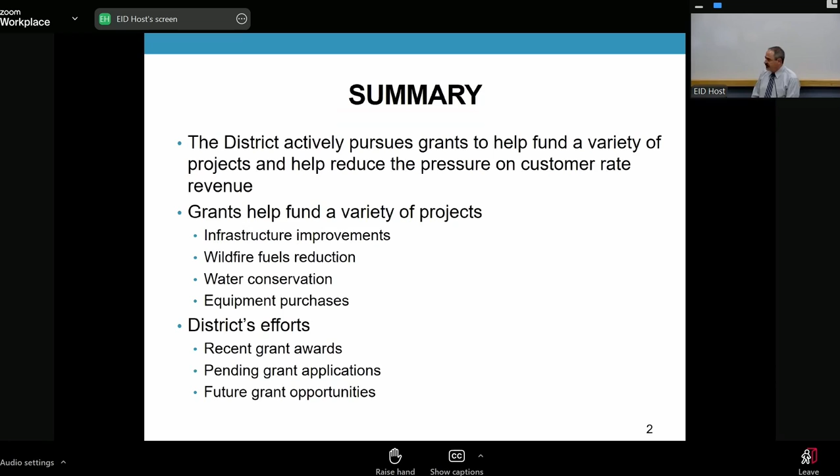All right, so first to start with grant awards. In the past 10 years, the district has received over $28 million in grant funding. These projects vary.

I'll just describe briefly going down this list. Folsom Lake Raw Water Pump Station received a grant of over $7.5 million through a cooperative agreement with the Bureau of Reclamation. Through the Regional Water Authority and Department of Water Resources, we've received funding for water line replacements and also for the Outingdale Intake Pump Station. We received close to $1 million through Reclamation for the Upper Main Ditch Piping Project. We received numerous grants through CAL FIRE's Wildfire Prevention Grant Program for hazardous fuels reduction projects around our critical infrastructure. And we've also received funds through FEMA's Hazard Mitigation Grant Program for emergency backup generators at both water and wastewater facilities.

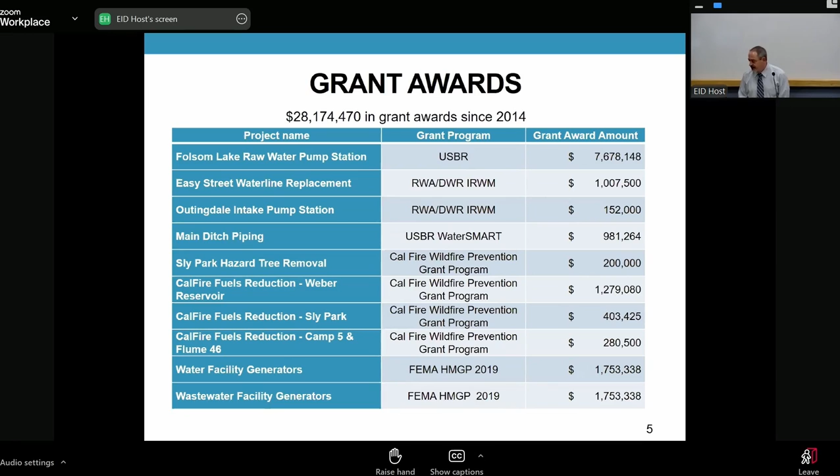Next slide please. Continuing on with grant awards, we've received a sizable grant for the Sly Park Intertie Improvement Project, another grant for the SPI through the American Rescue Plan Act. That same program, we also received funding for the Outingdale Dam Emergency Rehabilitation Project.

You may recall during the last meeting, Emily Bertram was here, EID's Park and Recreation Manager, describing the recent grant award notification they got for the skid steer masticator. Also recently, 3 other recent grants: meter replacement through USBR Water Smart program, a grant from CAL FIRE for additional fuels reduction work along the El Dorado Canal, and a grant through the FEMA Building Resilient Infrastructure and Communities Program for Flume 45.

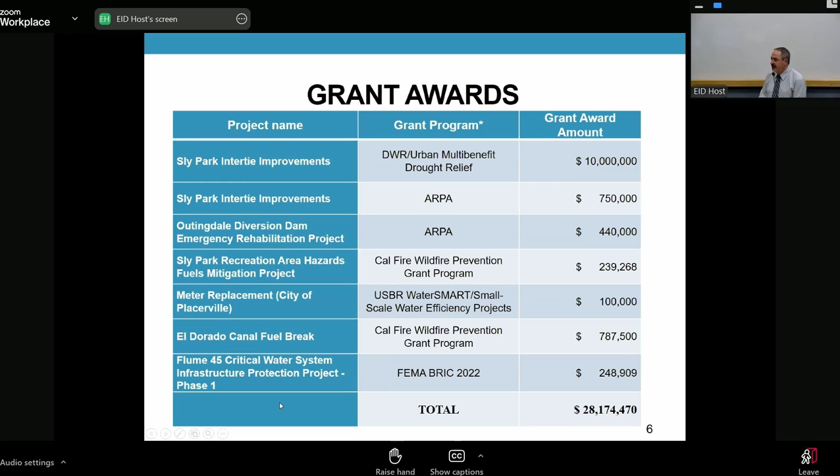I'm going to be talking about these last three in a little more detail. So meter replacement: we received a grant for $100,000 from Reclamation to replace some wholesale meters for the city of Placerville. This grant is going to help offset costs for planned replacements that needed to be done. There's 3 total meters in the scope of this grant, and they're going to provide more accurate reading - I'll be able to track water loss, identify leaks earlier, and just better overall accounting of the water.

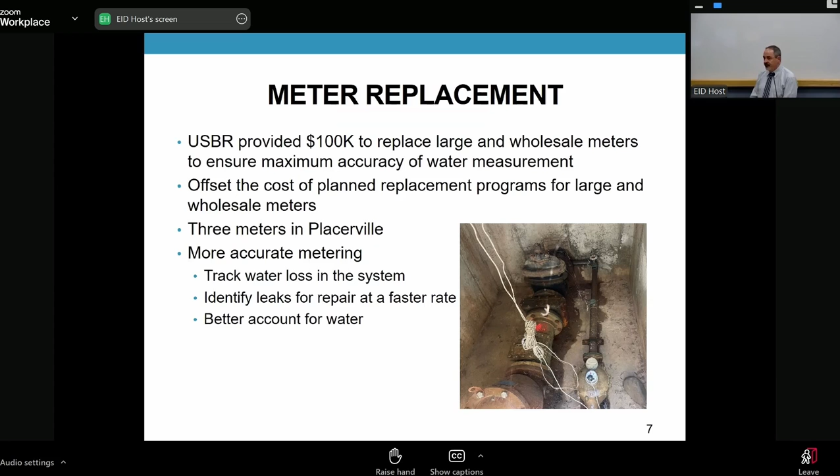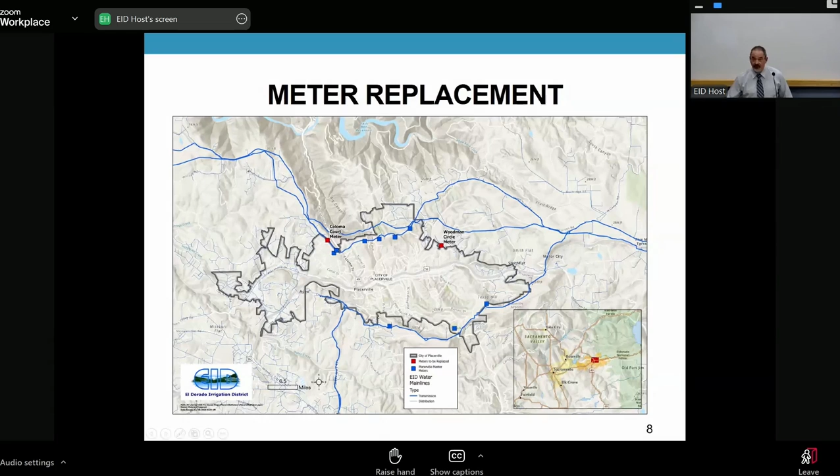This is just a map to give you an idea of where these particular meters are located. Placerville is roughly in the center of the map. The black line represents the city of Placerville's service area. The blue and red squares represent the wholesale meters that the city of Placerville has - there's roughly a dozen or so of them. The 2 red squares are the meters that will be replaced under this grant. I believe there's 2 at the Camino or Coloma site, and 1 on the eastern side - Woodman Circle, thank you. Next slide, please.

The El Dorado Canal fuel break. We received a grant from CAL FIRE for over $787,000 to do hazardous fuels removal along approximately 3 miles of the El Dorado Canal. This photo shows a segment of Flume 46. Flume 46 is approximately 3,300 feet long, a wooden flume, an asset that's highly at risk to damage from wildfire.

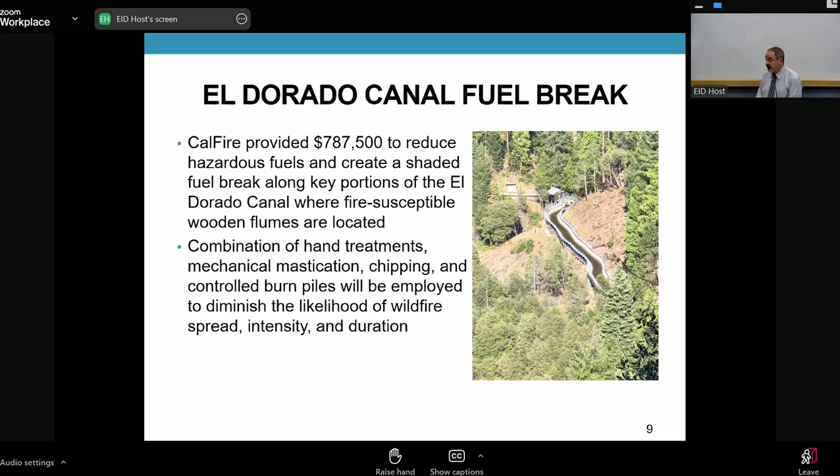You can see some of the previous work that was done under the previous CAL FIRE grants here, and we're looking to expand on that. We propose to do that through a combination of hand treatments, mechanical mastication where slope allows, chipping, and controlled burn piles. Next slide, please.

That's what we're seeking to do. One interesting anecdote we received after the Caldor fire was that protecting this type of asset was very challenging for firefighters, even from the air, because they weren't able to see the canal due to the dense canopy. So what we're seeking to do is thin that canopy so it's visible in the event of a wildfire.

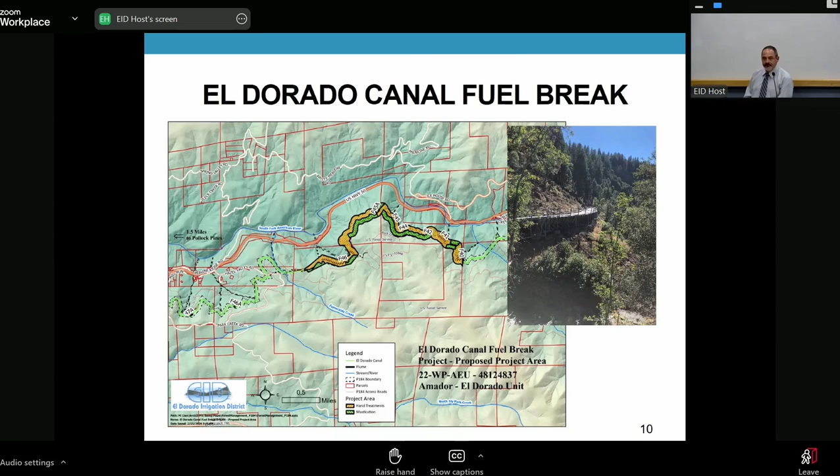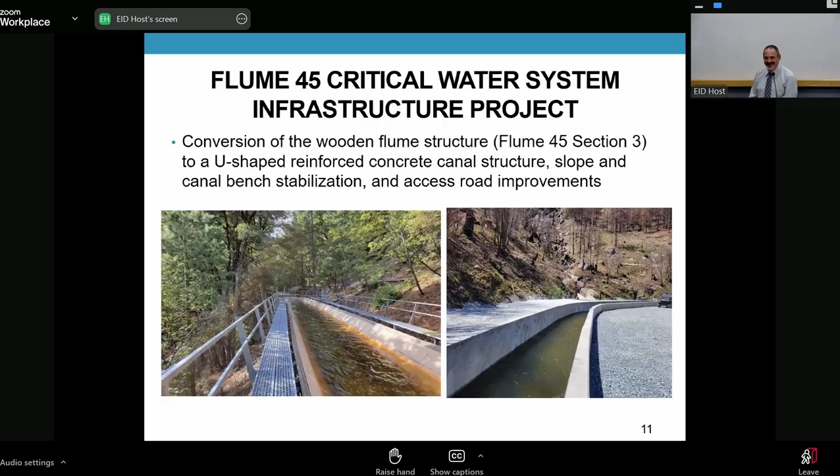So we recently received funding from FEMA through the Building Resilient Infrastructure and Communities Grant Program for the Flume 45 replacement project. I do have some statistics, but I need to reference my notes.

So the BRIC program first originated from congressional funding in 2020. During that round of funding, we submitted several grant applications through Cal OES for flume replacement, notably for Flume 30. Subsequently, in 2021, Flume 30 was destroyed by the Caldor fire, which put us in a good position to submit an application in 2022 demonstrating the vulnerability of these assets. We were recently awarded, just in July of this year, funding for Phase 1. It's a phased project: Phase 1 we complete environmental review and design, and Phase 2 would be construction.

A few more comments. In 2022, I just wanted to highlight, BRIC is a nationally competitive program. There was approximately $2.3 billion in funding. There were over 800 applications received, and 124 were awarded.

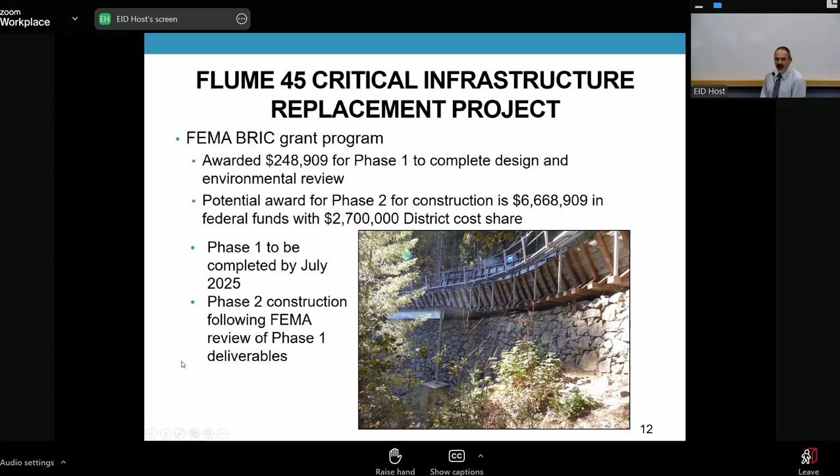To speak to timeline, Phase 1 is scheduled to be completed by July of 2025, complete with environmental review and design. From there, we submit our deliverables to FEMA for their consideration. There's a little bit of uncertainty about how long it will take FEMA to review those, just because it's such a new program—they haven't had a project go all the way through both phases yet. But under the best case scenario, we think we could be constructing in 2026.

Moving on to pending applications: we currently have grant applications out seeking approximately over $31 million in funding. There's one grant applied for earlier this year for improvements to both boat launches at Sly Park. We still have a few pending flume replacement applications through the Cal OES and FEMA Hazard Mitigation Grant Program—these have been identified as waitlisted, still under consideration if funding becomes available. We also have Flume 45 Phase 2, the construction project I was just describing, which would be up to over $6.5 million to help fund construction. Our most recent application to FEMA's BRIC program is for the Reservoir 1 and Pollock Pines Reservoir Replacement Project.

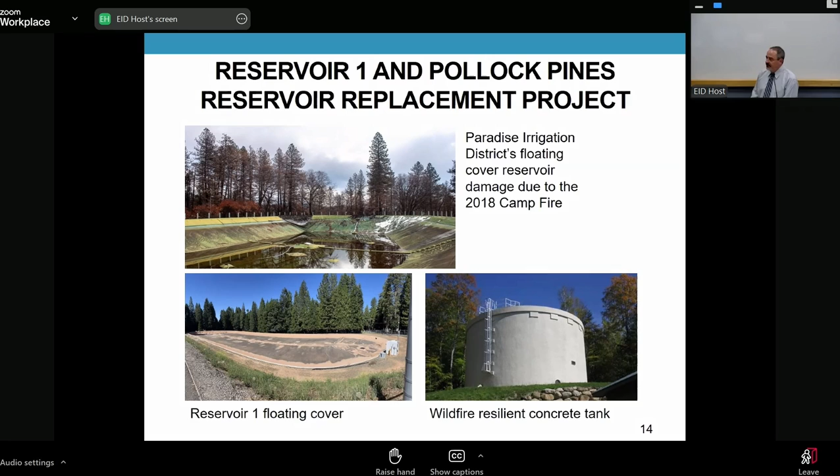I also wanted to describe public assistance. So grants, typically with a grant, we're seeking to obtain funding to go do a project. With public assistance, something has happened due to an emergency, and we're seeking reimbursement for those funds.

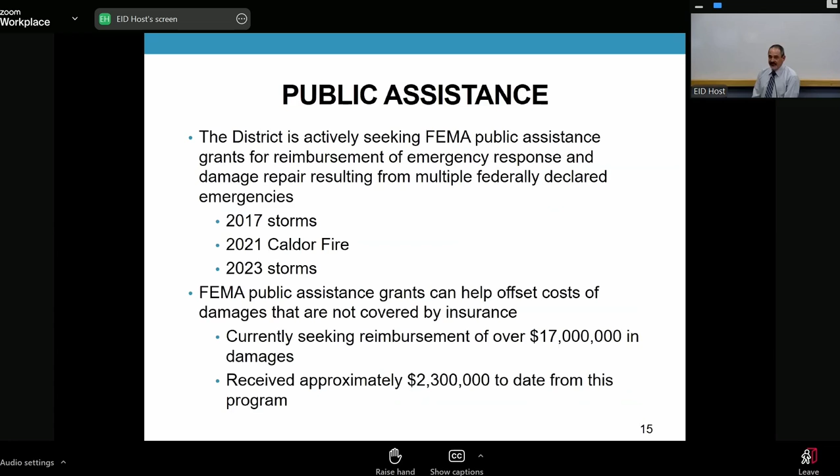So the district currently has a lot of projects in for consideration by FEMA associated with past emergencies: the 2017 storms, the Caldor fire, and 2023 storms. These public assistance grants will help offset the costs that we've already incurred and those not covered by insurance. Currently seeking reimbursement on over $17 million in damages, and to date we've received approximately $2.3 million through public assistance.

So we will continue to seek grant opportunities to help offset costs and reduce the burden on customer rates. We do have, as funded through last year's operating budget, a new in-house administrative analyst position that is focused on seeking grants. Mike Haggerty, he's here today. He's becoming a real popular guy.

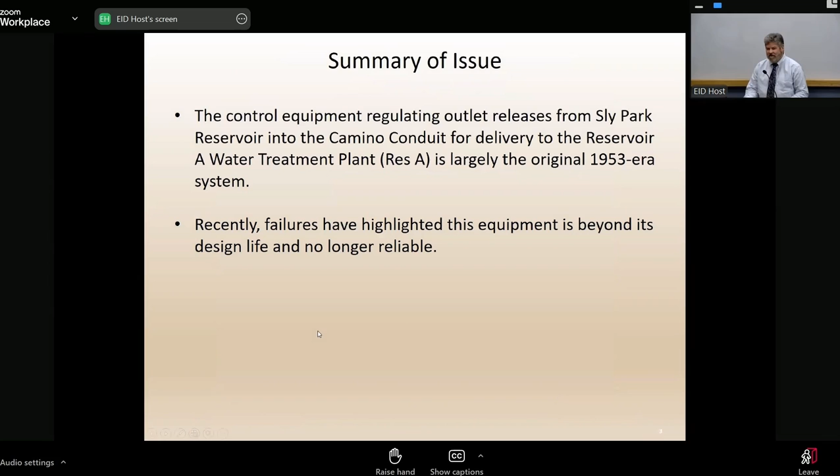Summary of the issue: the control equipment regulating the outlet releases from Sly Park Reservoir into the Camino conduit for delivery to Reservoir A water treatment plant is largely the original 1953-era system. That's about my birth date. Recently, failures have highlighted this equipment as beyond its design life and no longer reliable.

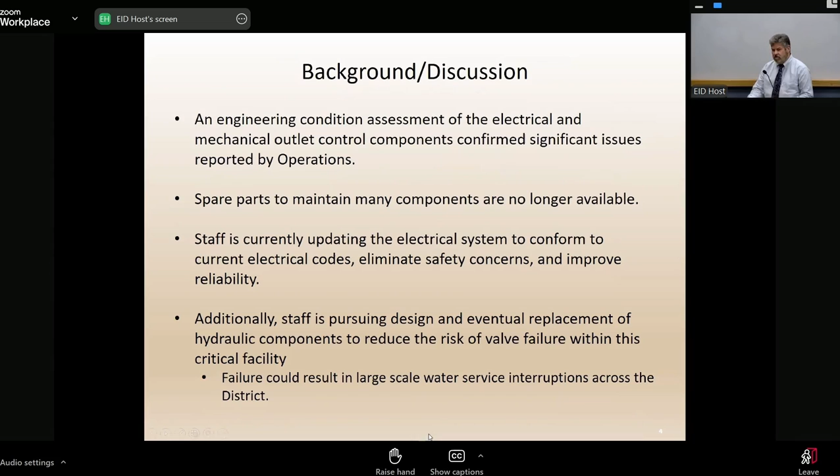An engineering condition assessment of the electrical and mechanical control components confirmed significant issues reported by operations. Spare parts to maintain many components are no longer available. Staff is currently updating the electrical system to conform to current electrical codes, eliminate safety concerns, and improve reliability. Additionally, we're pursuing a design and eventual replacement of the hydraulic components to reduce the risk of valve failure within this critical facility. A failure could result in large-scale water service interruptions across the district. Sly Park is really our most versatile facility, delivering water from Pollock Pines to the west to El Dorado Hills, so really our core service area.

What happened to my mouse?

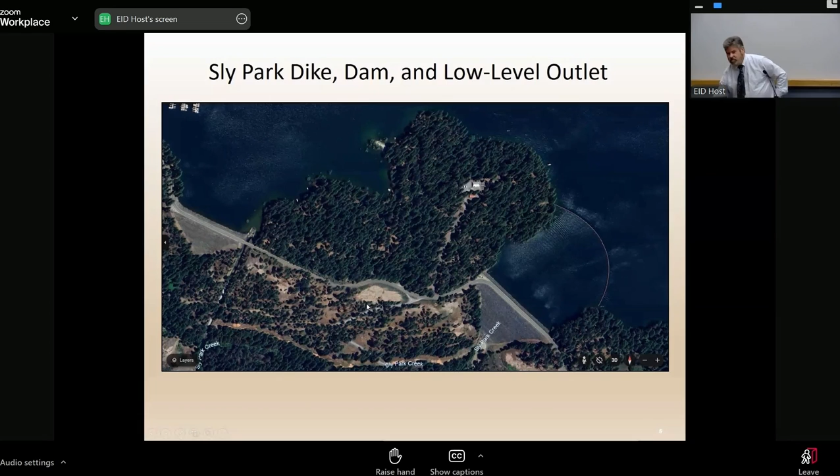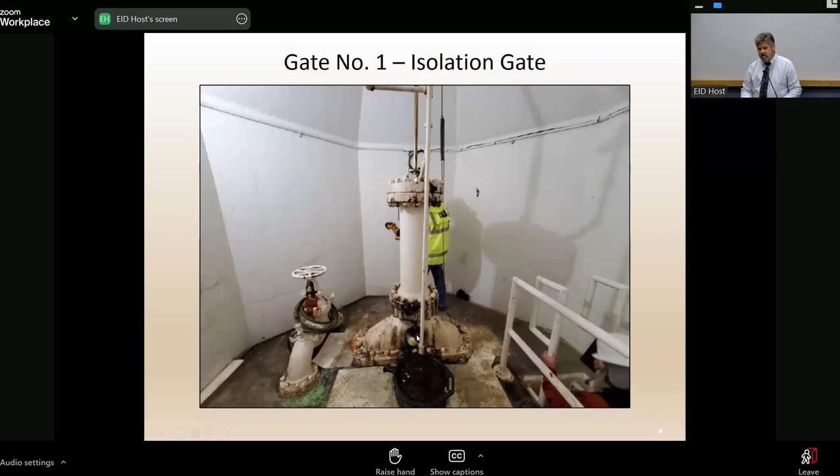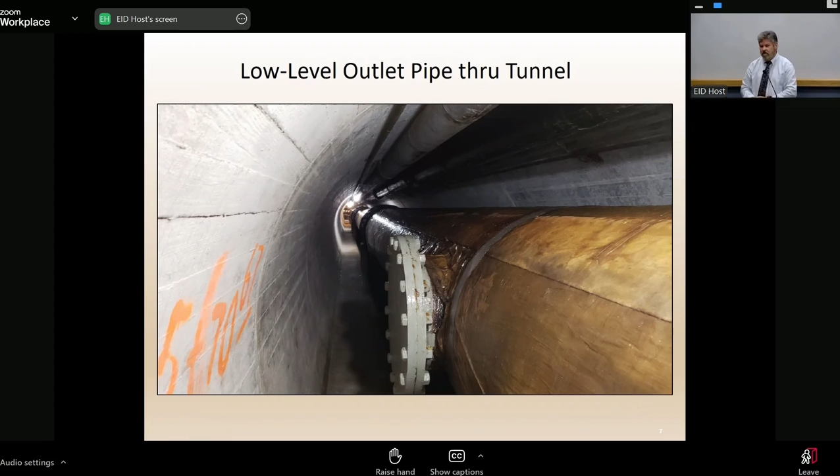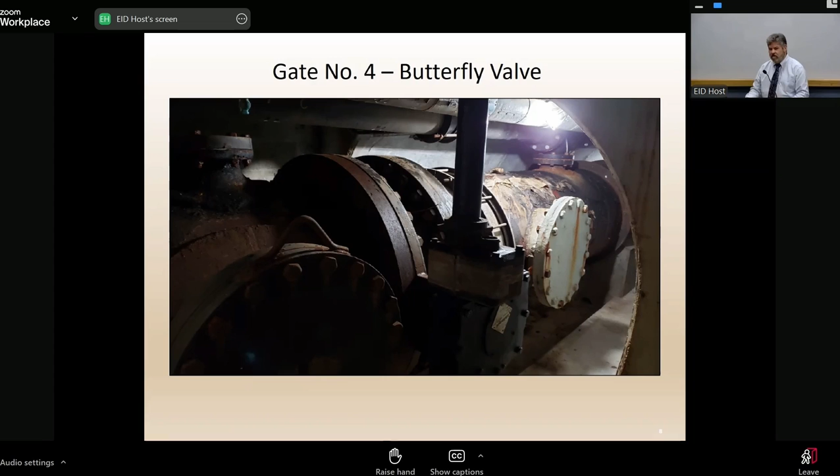John, are you going to offer the board a tour of the conduit?

If they would like. You might have to, if you're like me, walk sideways in some places, and duck. It's a little claustrophobic.

So as we mentioned, the existing components for the hydraulic system range in age from 30 to 70 years old. Spare parts aren't available for many of the components, particularly the hydraulic pressure units and the control valves, so it means we're looking at replacement of some sort.

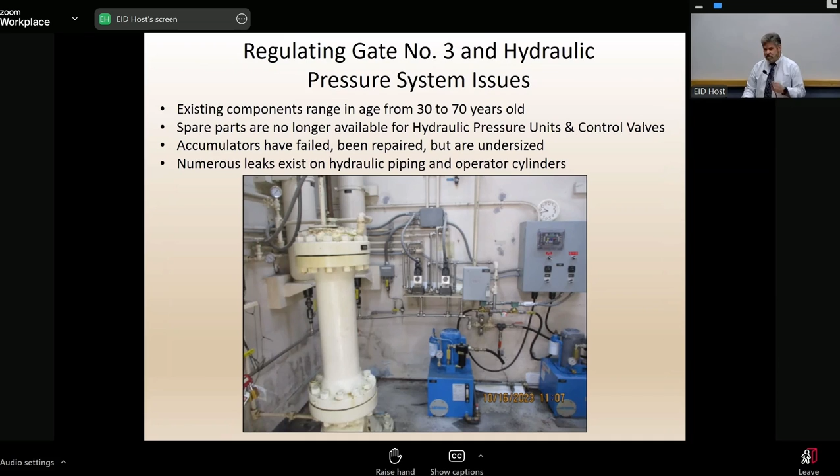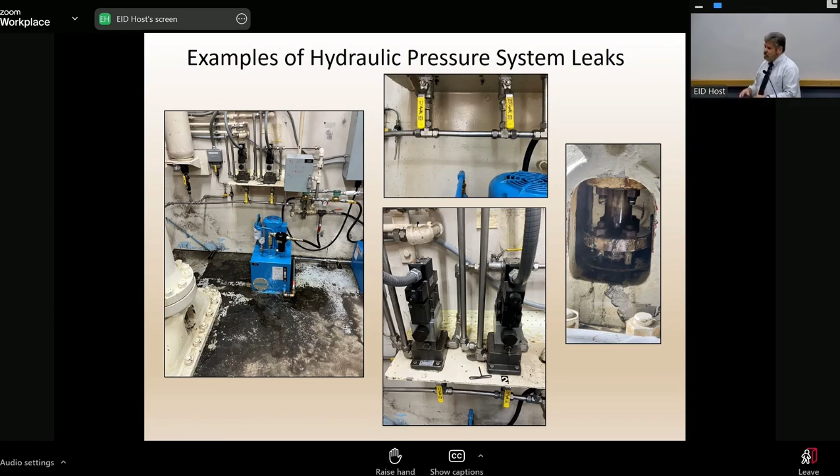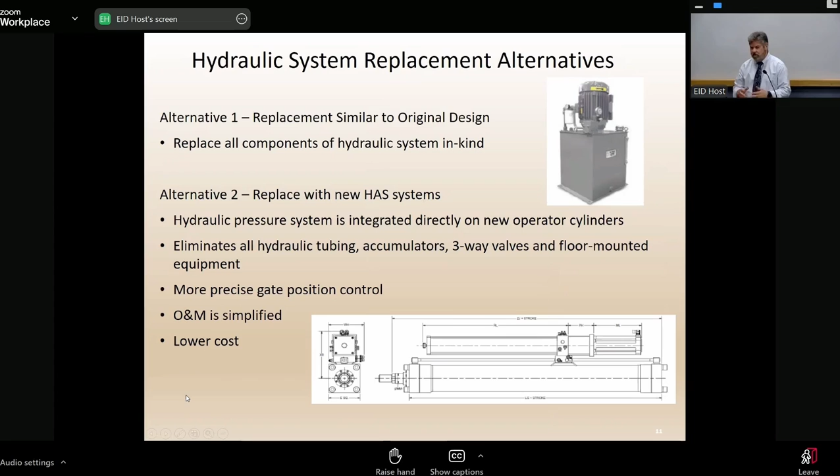The option we're looking at is having both gates 2 and 3, the regulating gates in that control room, and gate 1 upstream, all sized with the same ram, the same operating system, and to have a spare on hand - so that although they can be rebuilt, we'd have one available if we ever need that in short order.

We're also in the process of upgrading the electrical system, including replacing the main disconnect with a fast-acting breaker to reduce arc flash issues, providing a new 200-amp distribution panel suitable for 240-volt three-phase for hydraulic controls, and 120-volt single-phase for lighting the PLC, combining all the circuit feeds into one panel, which we don't have currently. That makes it difficult to trace the circuits.

We're looking at improving the grounding, labeling all the wires at the breakers and their terminal ends - improvements currently being performed by district staff. We're in the process of procuring this replacement equipment, and installation will follow as soon as we can thereafter. Ultimately, the facility will be brought into compliance with current electrical codes.

This is necessary not only for safety and to meet current codes, but also to have well-defined and proper electrical terminations and power supply for the new equipment. So this is going to get us cleaned up, modernized, and also serve the future overall.

Our next steps are to retain an on-call consultant who would document the electrical improvements and as-built drawings, prepare design drawings and specs for the hydraulic system improvements with integration of the electrical drawings, and assist us with preparation and evaluation of construction bid documents for the hydraulic system improvements. Once we have that, we would propose to bring bids back to the board to consider a construction contract.

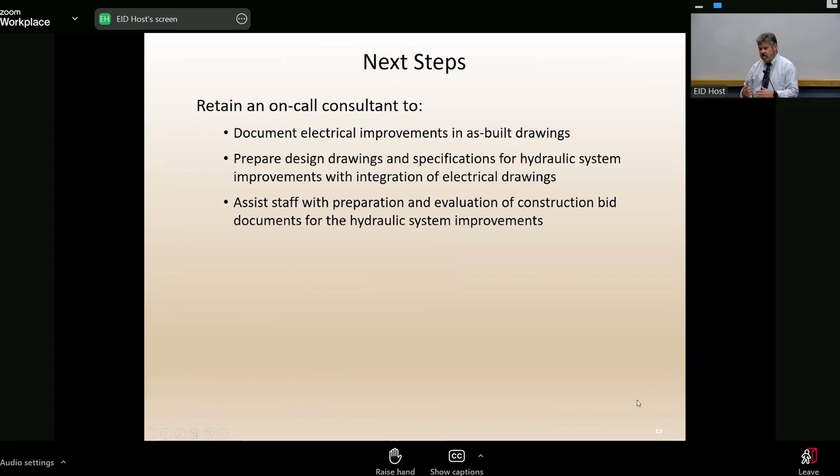So the funding we're requesting is the consultant contract of $52,991 plus capitalized labor of $27,000, and contingency of $10,000, for a total funding request of $89,991. The schedule is to conduct the design of the hydraulic system this fall and early winter next year.

Request board approval of the construction contract no later than summer, hopefully sooner, and perform those hydraulic system improvements during fall next year, going into winter if necessary. Part of that will depend on capturing a good time when it makes sense in terms of our operation. We certainly don't want to take a chance on having an outage and an issue when we're fully dependent on Sly Park.

Do you have a ballpark estimate of what the construction might be? I think we're looking at something on the order of about $500,000 from a preliminary estimate. Thank you - and I'm hoping it can be less than that, but that's the first shot.

I think I have this brainwave going on with Director Dwyer because those are the same questions, but I have another question. Earlier you said this was not included in the CIP. So this is for design only on the second part, which is going to be $500,000, which you just said - is that going to be included and updated with our CIP? How is that going to work? Absolutely, yeah - it's in our working version right now, not the one we approved last October.

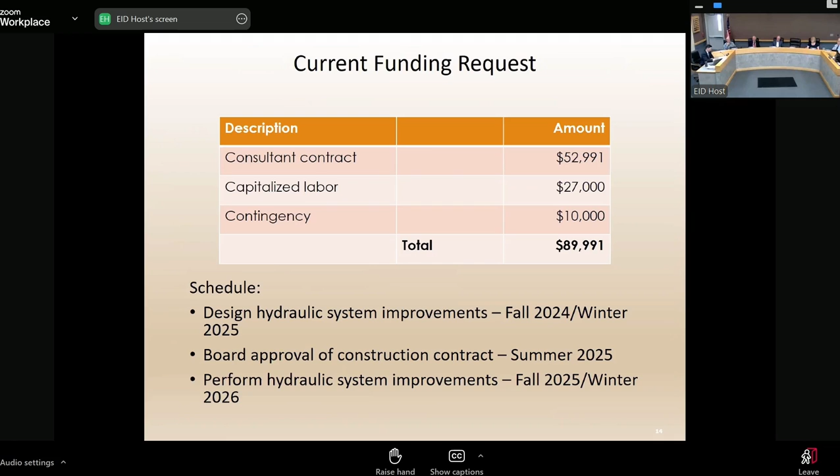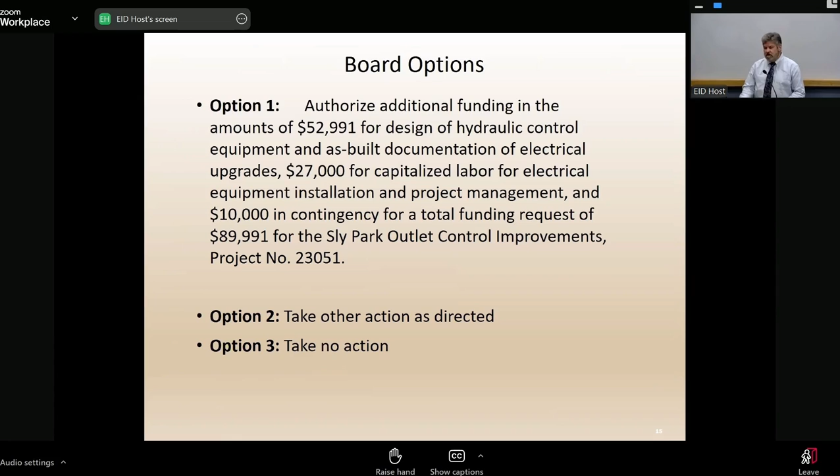Board options, option 1: authorize additional funding in the amount of $52,991 for design of hydraulic control equipment and as-built documentation of electrical upgrades, $27,000 for capitalized labor for electrical equipment installation and project management, and $10,000 in contingency, for a total funding request of $89,991 for the Sly Park Outlet Control Improvements, project number 23051.

I'll move option one. We already have Director Day moved option 1, so we would just need the second. I'll second.

Any further board comment? Any public comment or question? If members of the public would like to address the board, please refer to the detailed instructions on page 2 of today's agenda. President Day, it does not appear any members of the public are wishing to speak on action item number 6, option 1, moved by Director Day and seconded by Director Dwyer.

I believe we're ready for the vote. Please vote. Division 1, 2, 4, and 5 voting aye, motion carries.

Thank you, we'll be moving to closed session now. Just a quick note, we will call for public comments on item B before we go into closed session. Counselor, do we have a time estimate? As you indicated, the board will be meeting in closed session to discuss the two items agendized today as closed sessions A and B. I anticipate the board's consideration of these items will require at least 30 minutes.